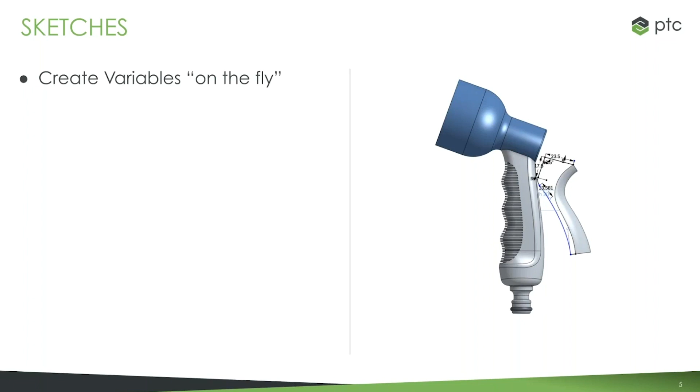The other one is constraining spline handles. This is something that a lot of users requested. If you do any kind of surface modeling, any kind of work with splines, one of the more common questions we got is, how do I manipulate the spline handles? I know I can grab and drag, but how do I constrain them? Or how do I dimension them? There were workarounds in the past where you could sketch lines between the points and use that. But now the spline handles are entities that you can select, that you can constrain, that you can dimension. So an important improvement for those working a lot with splines, the ability to constrain and dimension spline handles.

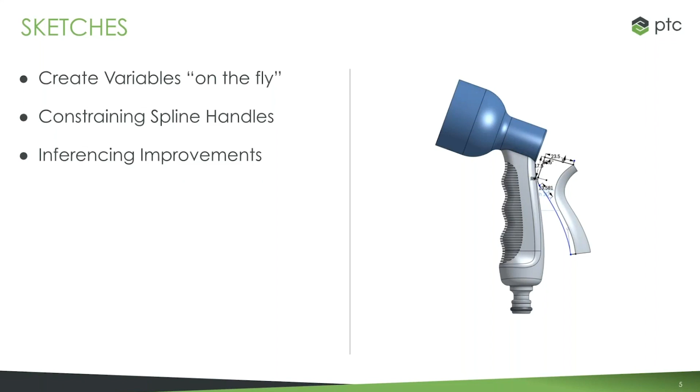So the final sketch improvement that I want to mention is inferencing improvements. This is a subtle one, and many of these, frankly, are subtle ones. But if you've ever done these things, or you do these things on a regular basis in Onshape, you'll know that we've made some serious improvements in how it behaves. So while they may seem subtle and small, they can be very big in terms of day-to-day use, especially with sketching, because sketching is stuff we do all day, every day. All right, so let's jump into a few examples of this.

I want to dive into a very simple example of variables, and I want to go through the workflow that we've done in the past and how we've improved it. It's very simple. If you've ever worked with variables prior to this update, what you had to do was click variable, give your variable a name. Let's call this OD1 and give it a value. There's other things you could do, like define different types of variables. But at the basic level, creating a variable is just giving it a name and a value.

You'd hit OK, and you'd see this variable in your feature list. Now, if you wanted to use this in a sketch or a feature above the variable, you'd have to drag it above, or roll up first. But it needs to be in the right position, so you kind of have to think about where's the variable going, where am I going to use it, and so on. So now I have the variable here, it's in my feature list. I can now actually use it. So there's the step of creating the variable.

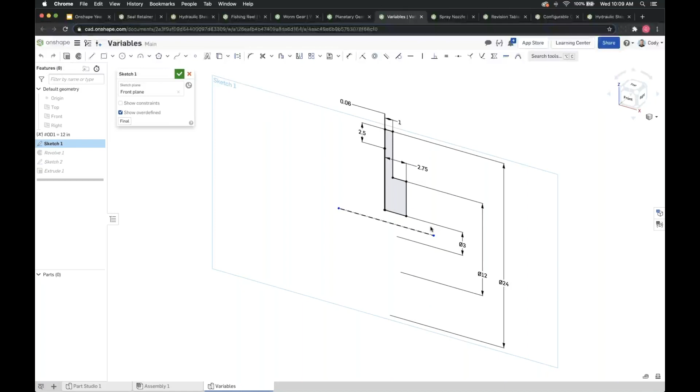Then there's the step of actually going into the sketch and changing something. So if I go in here, I can use hash symbol OD1, and it allows me to grab that variable. So that's been the usual workflow. To date, before this improvement, you would create the variable, then you would go into the feature or sketch that you want to use that variable, type hash symbol, and you would find your variable name there. But the feedback that we got is we'd like to be able to create variables on the fly as we're sketching and not have to think ahead and create the variable as a feature and drag it to where it needs to be in the feature list.

We want it to be a bit more intuitive. The thought was we allow the user to create variables as they're adding dimensions. It's a subtle thing, but if you do a lot with variables, it's a big improvement. Instead of creating a feature first, I just go straight into my sketch as if I were sketching.

I find the thing that I want to link to a variable, in this case this OD dimension. I double click as if I were changing a dimension. I use the same hash symbol, and you'll see there's this option that pops up as soon as you hit the hash symbol key that says new variable. Essentially, this just launches the variable dialog within the sketch. What I really like about this, though, is it automatically chooses the correct combination of things.

So you can have different variable types. But if you select a dimension, you're saying I want a variable tied to a length, because naturally that's the dimension. So it will select the appropriate type of variable type without having to do anything special.

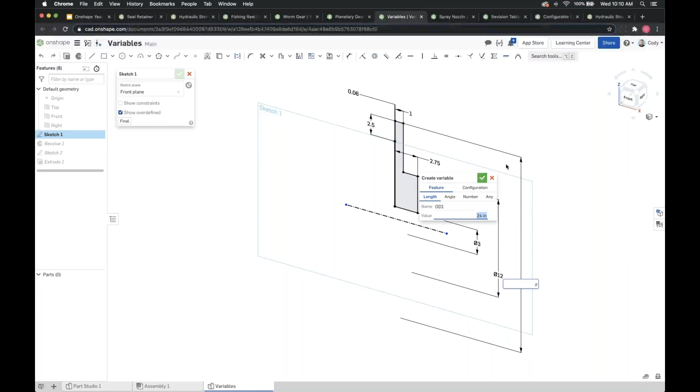Now it's pretty straightforward. You just type a name, let's say OD1. It grabs the value that's there by default, another cool aspect of doing it this way. Then you just hit the green check, OK. Notice what happens is it adds the variable above the feature where you want to use it. So you don't have to think about where am I going to use it, make sure it's higher than that in the feature list. It knows all that, so it just puts that in the necessary place.

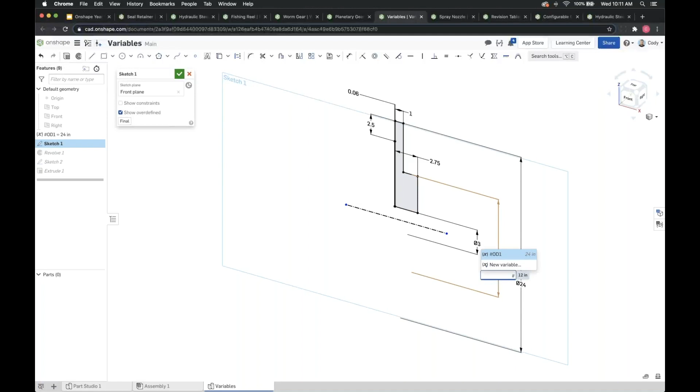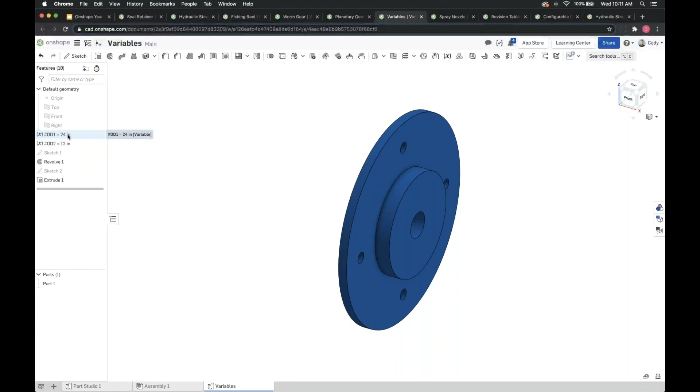So that's really all it takes. If you want to create variables, type the hash symbol into the dimension dialog, the little window, and you'll see this new option for new variable. You create the variable on the fly, and now you have variables in your feature list without having to go through the effort of clicking variable, defining it beforehand, dragging it up into its correct place in the feature list. It's much, much easier. So that's what we refer to as creating variables, quote unquote, on the fly. It just means you don't have to go through the headache of defining the feature first.

So the next one that I have is constraining spline handles. This is another one that's subtle. It's not a big change, but if you do a lot with splines, and we know there are a lot of people out there that do, this is a big quality of life improvement. That's the best way to describe it, because you would have to go through several additional clicks to do something like this previously.

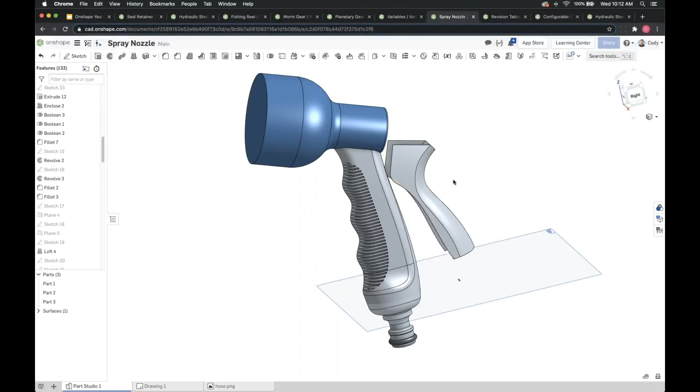So let's go to an example. Bear with me for a moment here. Let's say that I'm designing a spray nozzle, and I have this spline. Let's find the edge here. Let's say that I have this sketch that's composed of a spline, and of course any spline has the handles.

Now we've had spline handles, of course, since we added splines - it's not a new feature. What is new is the spline handle itself is a selectable line, so to speak. That wasn't always the case. You could select the endpoints of the spline handle, but the line itself wasn't always a selectable object.

So what a lot of people had to do was create a construction line, then sketch a line between the two points, and then constrain that. There were ways to accomplish this before, but if you have two spline handles on every spline and you work with dozens of splines, manually adding lines is a tedious task.

So in short, now when you go to dimension or constrain, you can select this spline handle as a selectable piece of geometry and define it - define the length of the spline handle, its constraints with surrounding geometry. All of that is much easier to do now as of this update last year. So that is improvements to spline handles, splines in general, and the ability to select a spline handle as a selectable object.

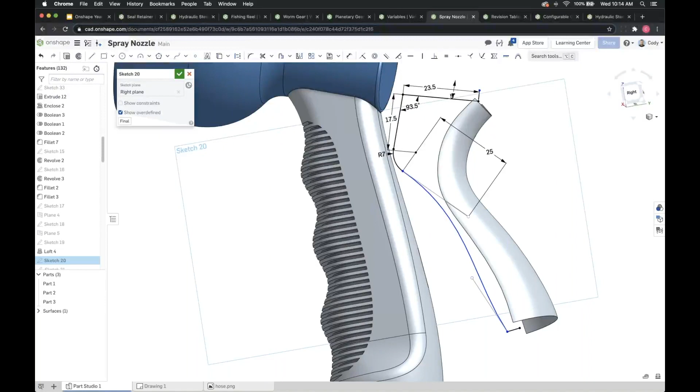All right, let's move on to the next one on my list. This is inferencing improvements. This is another one that sounds very small, right? At a glance it doesn't sound huge, but this is probably the single biggest sketch improvement we've made in many years now. That's a productivity improvement. And I'm going to jump into an example, bear with me for a second here.

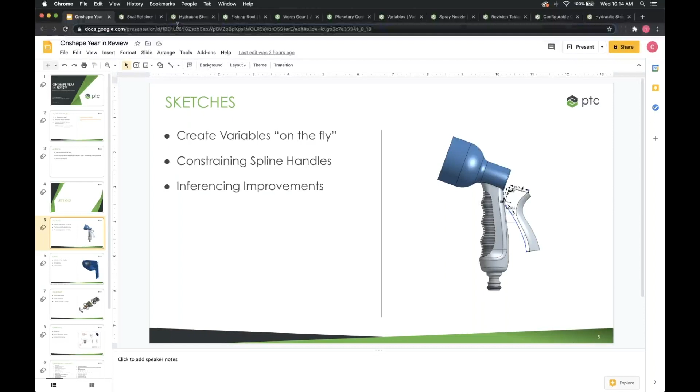Let's go into the seal retainer. Essentially, the way this improvement works is that you can reference edges, midpoints, and arcs of anything that's coplanar to your sketch plane. Now, this was a limitation in the past, especially if you had planes that happened to be coplanar with a face. What would happen is you would not be able to constrain relative to pieces of the surrounding geometry.

Again, this sounds really subtle and simple, but if I were to take you back a year, and you tried to sketch a line attached to this edge, you'd find you'd have to sketch the line and then manually attach it afterwards. Because there was no way to inference things that were coplanar to what you were sketching on. And in this case, this face is coplanar to the plane I'm on.

So if I wanted to grab the arc, the center point of the arc, any kind of reference off of these surrounding faces, I would have to sketch the geometry and then manually constrain. But now, because we've brought those inferences through, anything coplanar, you'll automatically get the midpoints, the endpoints, the arcs and edges themselves. So I can grab the midpoint of this arc, snap a line to the center, and not have to manually constrain anything.

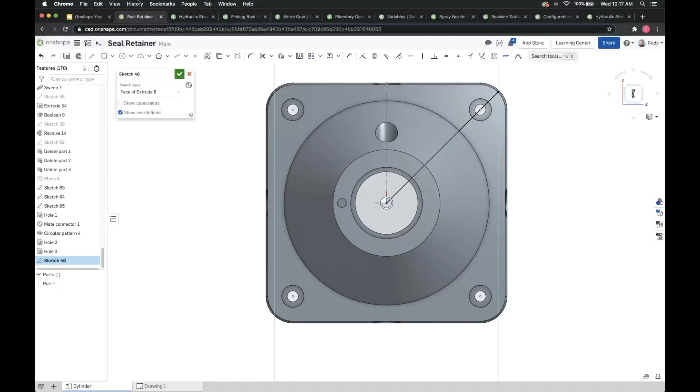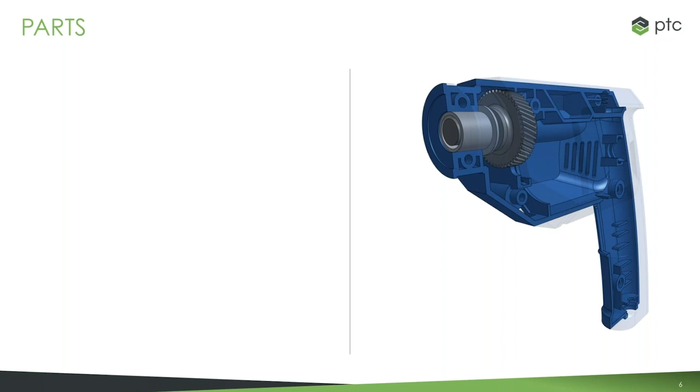All right, let's move on. The next category in our list is parts. There are a few highlights I want to point out in the Part Studio environment in 2020. As I mentioned before, there were a lot of improvements in 2020, so it's difficult to pick your top three, and it's highly subjective, but I'm doing my best to pick those I think people will like. The first is isolate.

This was something highly requested. We had the ability to isolate at the assembly level, and it was very much a liked feature, but we didn't have the ability to do this in the Part Studio. If you have a multi-part Part Studio, which is very common in Onshape, you didn't have the ability to quickly isolate things. There are a few really neat use cases for isolating a Part Studio that are actually unique compared to Assemblies. But in general, isolate is something we brought to the Part Studio that was highly requested, and again was in the past limited to Assemblies.

The next one is hole tables. This is something we did in a very unique, very Onshape way. We have our own built-in hole table functionality.

Anytime you use a hole feature, a hole table is automatically created. I think this is useful in a number of different ways. But the biggest thing I'd point out is you can look at all the hole information in the 3D model without ever creating a drawing, inserting views, inserting hole tables, or making a formal drawing. If you just want to know what holes are in this part, open up the hole table in the Part Studio and you'll have all the details there.

We found a lot of users, if they just want to know what size hole this is and how many there are, would have to create a drawing, insert tables, or know how to navigate the feature list. But now I could send this model to someone and just say click the hole table, and you have all the details for the holes you need, without having to create a drawing.

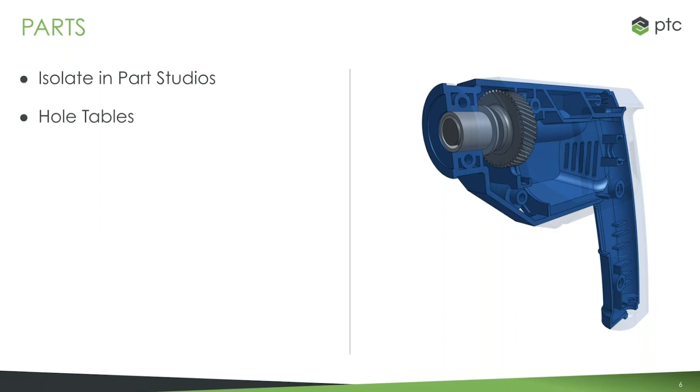The last one is face colors. This is another one that sounds very simple, very subtle, but is probably one of the most requested features we've had in a number of years. This is highly, highly requested. And although it is simple, it is something that nearly everyone wanted. It was something we heard a lot. So let's dive into each of these.

There are a few examples I want to show, but let's start with the hydraulic steering pump and isolate. I mentioned before that the ability to isolate in the past was limited to the assembly, and the ability to do it at the assembly level was very well liked. It was a very popular feature. But one common criticism was, well, I want to be able to do the same thing at the Part Studio. And we didn't have that functionality until this most recent update in 2020.

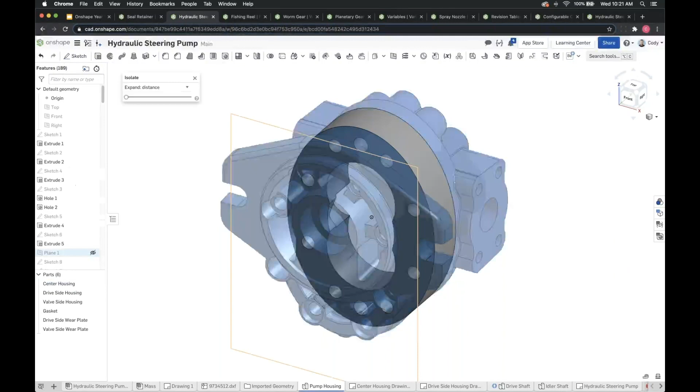So it's very simple. You find the thing you want to isolate, in this case center housing, and you right click and isolate. It works exactly the same way as it does at the assembly level. Right click the thing you want to isolate, select isolate. You can select multiple parts if you'd like, and isolate them, so you have the same kind of flexibility you'd had at the assembly level.

You can also choose to expand based on connectivity and distance, and bring in additional parts into the isolate, just with that grab and slide functionality. Same thing as at the assembly level. But the most important thing, in my opinion, is this really does simplify the ability to interact with certain faces or parts that were otherwise difficult to access.

A lot of people are aware of select other, where you can right click, select, and then grab a face or something along those lines. But this actually allows you to grab holes, faces, edges that are inside of the model very quickly. And it's more of a persistent state than if I were using select other.

A lot of times we get asked, how would you handle working on a part that's inside of another part? A lot of people will hide those outside parts, but then you're turning them on and off when you want to grab things from them. It becomes much more difficult when you actually need them. The neat thing about isolate is everything is still there.

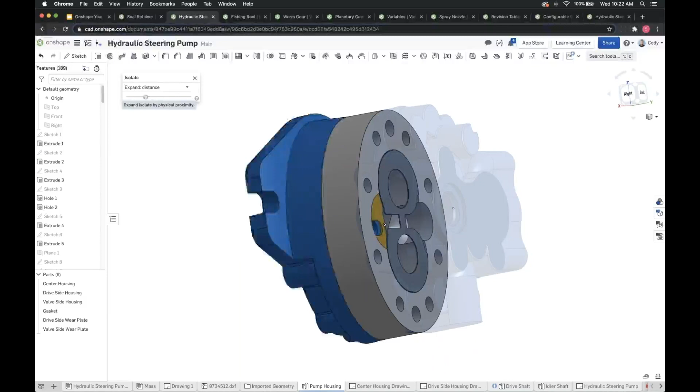I can bring it in or not, very quickly. But I can also grab the faces, the edges, all those types of things without having to do select other or any kind of other selection sets. So that is isolate in the Part Studio.

Of course, it's just a simple function: select the thing you want to isolate, right click and isolate it. But the big news here is it's been brought into the Part Studio, meaning it allows you to interact with the Part Studio, especially these kind of nested multi-part Part Studios, in a more detailed, easier way.

All right, so that is isolate in the Part Studio. The next one that I have is hole tables.

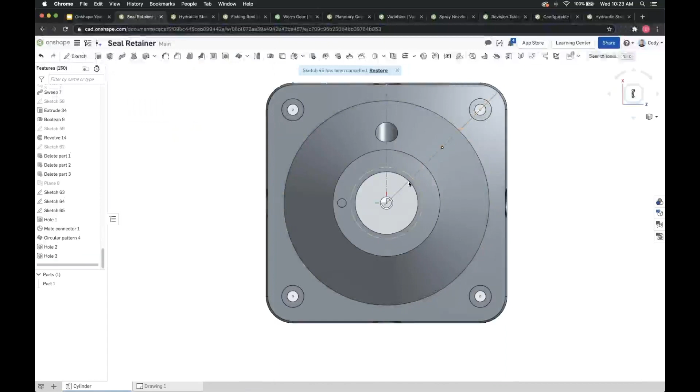This is another one that I think we've done in a really unique way, and that is essentially anytime you use the hole feature, our standard out of the box hole feature that you see in the Part Studio toolbar, you will automatically get this hole table flyout on the right hand side. And if you've used Onshape for other advanced features like configurations or appearances, you'll know this flyout has a lot of different functions.

So what we've done is build this table into an interactive piece of the UI. A lot of people will create a drawing just to get the hole table, with references and so on. But if all you're looking for is hole information and where those holes correspond with the part, this is just as useful, and there's no need to create a drawing.

In this case, you can see I've hovered over tag A for my hole table, and it says quantity 4, and it highlights the edges associated with those holes. So it's easy to get that cross highlight functionality, and even if I didn't model this part, I can quickly find the hole information.

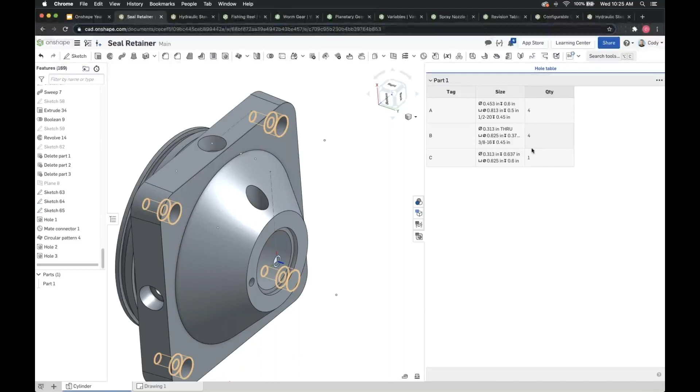And I think that's one of the biggest benefits of using this. Of course, it's nice if I have a very complex part with lots of holes to glance at everything quickly. But I think the real benefit is, I didn't model it, but I want to know what are all the holes. Maybe I need to buy taps or drills or whatever it may be. I can just open up the hole table, go through all the various holes, and mouse over them to see where they correspond with the model itself.

So a great visual. It allows me to see what's on the part, what the hole sizes are, and how many quantity there are. Now, as I mentioned before, you have the ability to do this at the drawing level as well. If you want your hole callout in the drawing, that still exists, but the big benefit is the ability to interact with these holes without having to create a drawing and insert a table.

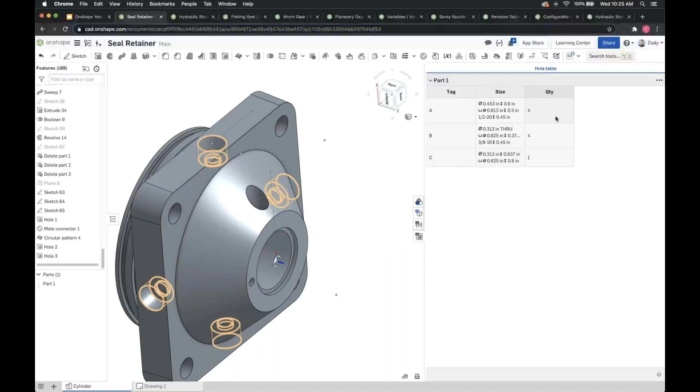One final comment is you can copy this. There's a copy functionality that allows you to bring this out into a different place. I'm often asked, what if I have holes that I want to drop into some software and maybe use to cut on a laser jet or something like that. You could do that. You can bring all of this hole information into a single sheet and use that to drive other things.

So that is hole tables. Again, the big thing to stress is anytime you use the hole feature, Onshape's default hole feature, you will automatically get this flyout. You don't have to do anything with it. It's much like the bill of materials at the assembly level. The more features you add, the more things get added to the hole table. But you're not forced to interact with it. It's just a neat way to see all of the holes in a part in a single place in the Part Studio.

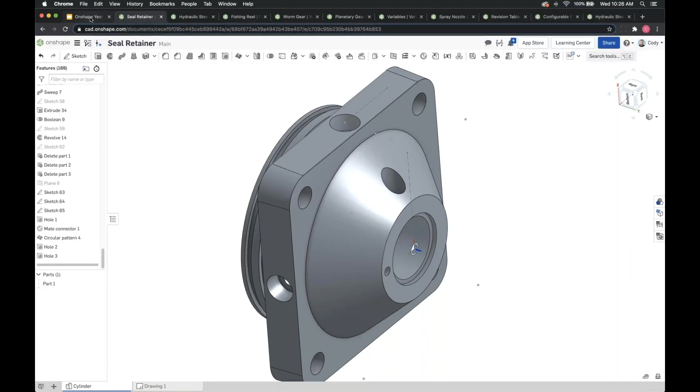So that is hole tables. Let's move on to the next one, and this one is face colors. The reason I think this is so important is just the sheer number of requests we got for this. This is a very simple feature in how you use it and how it's supposed to work.

You apply a color to a face. The limitation in the past was you could only apply a color to a part, the part was the lowest level, so to speak. So your entire part always had one color. But we often got asked, well, I want to make this part of the part this color. There are lots of different examples of why, but it was a limitation. In the past, you had to apply the appearance at the part level, and the entire part was the same color.

So a simple thing, admittedly, but something that was really highly requested. Although it's probably one of the simpler improvements we got, it's probably one of the highest requested in terms of just sheer number of people asking for it over the last several years. It's really simple to use, and as I mentioned before, there are a few examples where you might want to use it.

One example that we were often asked is, I want to be able to define machined surfaces versus painted surfaces, or machined versus cast, or I just want to be able to delineate between surfaces that are a certain color and surfaces that aren't. Machined surface is probably one of the more common examples.

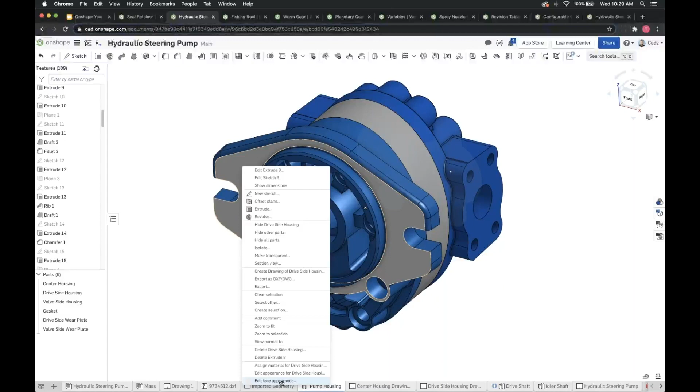Now, I will say once you have an appearance associated with the face, you right-click on it and you have this edit option. So it's important to keep in mind, if you need to go back and change a face color, just go back to that same right-click menu, right-click the face, and you'll see instead of Add it will say Edit, and you can go right back into that dialog.

Another neat thing that we did with this same update is the appearance flyout - the appearance panel on the right-hand side. This is another use of the right-hand panel flyout, but it gives you all the appearance information in that Part Studio. So you can see that most of my appearances are applied at the part level - the center housing, the valve side housing, these are all part level appearances. But there is a drive side housing that is largely blue, but has one face selected that is this color that we specified. If I double click, it will take me back into that appearance dialog, and I can change the color from here also.

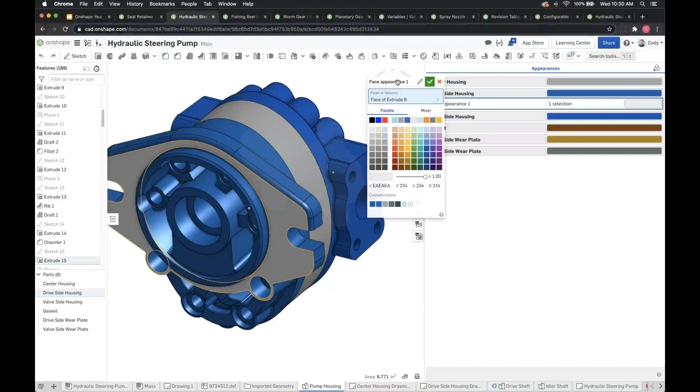So just a tip, if you prefer to interact with all of your appearances in a single flyout - a lot of people will build their model and then go through this appearance flyout and make everything look realistic as kind of a last step - this is an easy way to go through everything at once and do that. So that's the appearances, face appearances, and the appearance panel flyout.

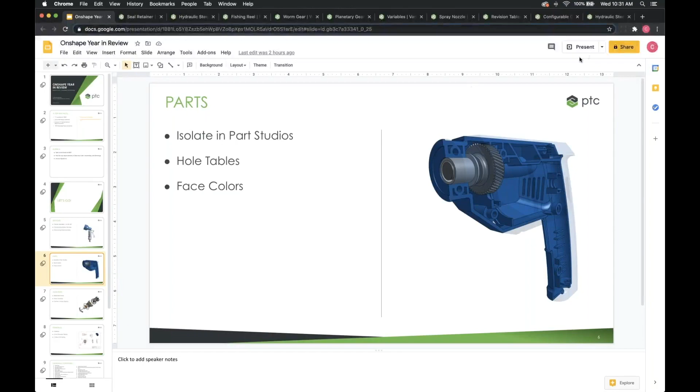All right, so that is face colors or face appearances. Let's move on to the next topic in the list, and that is assemblies.

So there's one really big improvement that we did with assemblies in 2020 that, of course, I want to start with, and that is exploded views. For a number of years, of all the improvements we're going to talk about today, this is the most requested - across the board, whether it's professionals or enterprise or students. Everyone wanted exploded views, and so it's a really popular, important feature of any CAD system. And in this case, we added it in 2020.

Now, in usual Onshape fashion, we've done a lot of unique things with exploded views, and I'll go through and highlight some of them in this webinar. But we've done a dedicated webinar on exploded views, so if you're interested in really diving into exploded views, the details of creating them, I'd really recommend checking out that webinar.

It's a whole hour on that topic alone, and we'll give you a lot more information than I'll be able to get to here. So that was a very big improvement.

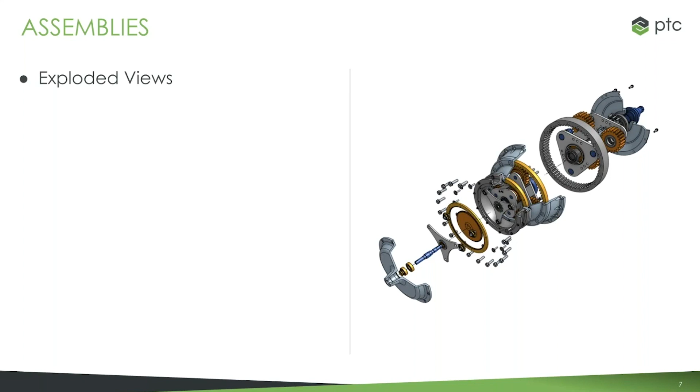I think it was in the February update in 2020, so we added exploded views. We also added a number of other improvements that I think are valid. When I say exploded views, I also include exploded view lines and the ability to insert those exploded views into drawings. All of those things came in 2020.

Another highly requested one, very simple but very important: mass override. You have the ability to assign a material to your parts in Onshape, and that will give you a mass. But oftentimes we're asked, well, I imported this part, I know what the weight is, and I can't figure out how to get the material to match the weight. So what you do is you just override the mass. I'll show you an example of this in just a second. This is particularly important when you've imported parts or geometry and you need to assign the mass. You know what the weight is, you need to assign it. In the past, people would choose random materials that got close, but there was never really a good way to define a mass. So mass override, that's a very big one for assemblies.

The final one, somewhat related to mass override, is the center of mass display. This was highly requested at the assembly level, some kind of visual for the center of mass, and now we have that. In the past, we had center of mass as units, you could see the numbers, the location for the center of mass, but there was never any visual in the assembly itself of where that center of mass was. So that's the improvement added in 2020. You'll actually see a little indicator at the center of mass when you're looking at mass properties.

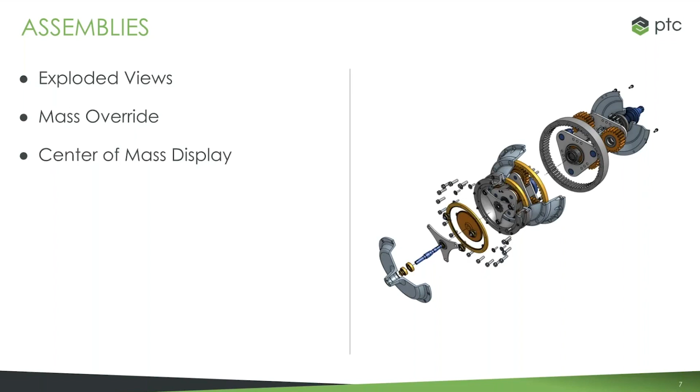All right, so let's dive into it. I'm going to spend just a few minutes going over exploded views. I know I'm just going to touch the surface for many people out there, but I'd recommend if you're interested in a deep dive on exploded views, check out the webinar we did right after we launched it.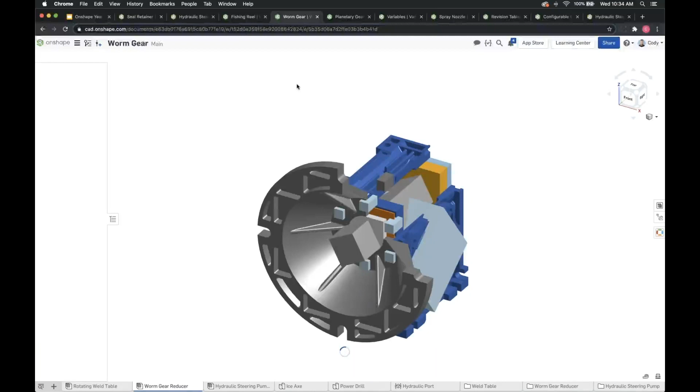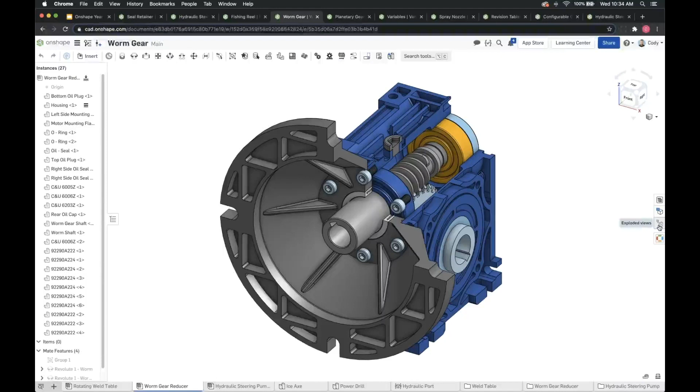So let's start with how to start your exploded view. Here we have this worm gear assembly, and of course the goal here is to create an exploded view. A lot of the functionality I've shown you over the last 10 minutes or so has involved interacting with these flyout panels, and exploded views use the same functionality. On the right side, in any assembly, you will see this exploded views flyout.

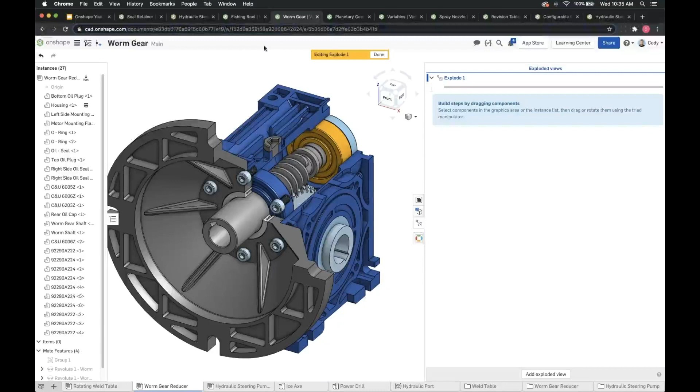I left click that and it brings up the exploded views flyout panel where I can build my exploded view. It's fairly straightforward: you click add exploded view, and you'll see the toolbar disappears because you're going into an exploded view mode. That's the way to think of this. If I want to go back and edit mates or manipulate the assembly outside of creating exploded views, I would need to click done to get back into that assembly editing mode.

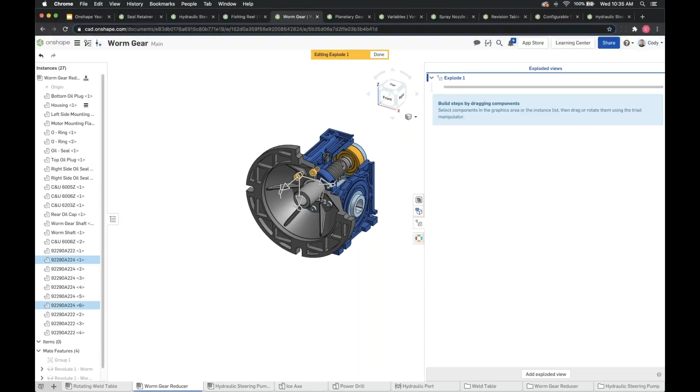But in my case, I want to create an exploded view, so I start by dragging components. You see it gives me instructions here. I'm just going to grab a series of bolts and drag them out. So we'll grab and drag, and what you'll see is as soon as I let go of the mouse, explode step 1 appears, as well as default explode lines.

Now the explode lines are on by default, and they come from the centroid of the model, but you can adjust that. If you want explode lines that come from a very specific place, you can choose a vertice, a face, or an edge, and the explode lines will reroute from that reference. But by default, when you create your exploded views, you will automatically get explode lines from the centroid of the part being moved.

Now, the other thing I would point out is by default, you're just dragging it out at random distances, but you can type in actual values. So I can type in an actual offset.

As you start to get into more complex exploded views with many different exploded elements, you want evenly spaced exploded views, and the explode distance becomes important. I've even seen people use configuration variables to control these types of things. There's lots of neat things you can do with the distance itself.

By default, when you select parts and grab and drag, it's just using the default orientation of the assembly. But you can specify a direction. If I need to explode along a certain edge or axis, I click specify direction, then click on an edge or reference, and it will explode along that direction.

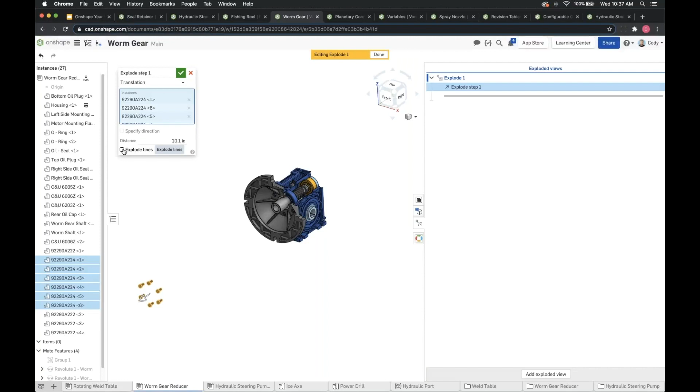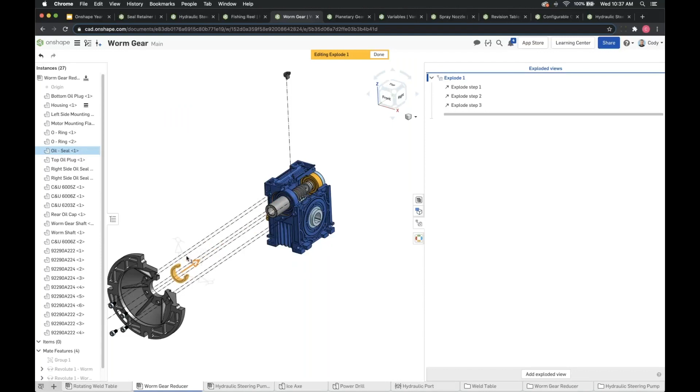So that's really it to creating exploded views. I hit the green check, and now I have my first explode step. I could go right into the next step, clicking the housing here, grabbing and dragging, and now I've got a new explode line, a new explode step. I can hit the green check, move on, grab the next one, drag, and very quickly start to tear the assembly apart. Keep in mind the explode steps are very easy to create—just grab and drag until you've disassembled your assembly.

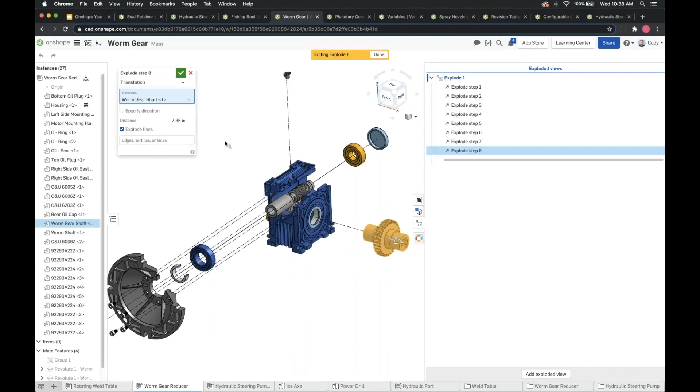I'm going through this quickly here, but you kind of get the idea. So now I've created this exploded view, and what I want to do is go over a few tips I have for interacting with exploded views. Just a few random tips, so bear with me for a moment.

Let me jump into my planetary gearbox. And while I'm doing that, let me answer a quick question: if the same components are then exploded orthogonally to where they are now, will the lines follow? Yes, if they're exploded in a separate step. I showed you one explode step, but you can have multiple explode steps, and it will capture those movements with explode lines.

Can you turn off individual explode lines? That's a good question—I don't think so. I think every explode line is associated with the movement. Now, you could just create one explode movement involving one part and then turn off that individual explode line. I'll double check this; I don't think there's a way to turn off individual explode lines if I'm generating multiple at once, like a right-click hide type functionality. But I'll double check that just to make sure I'm right.

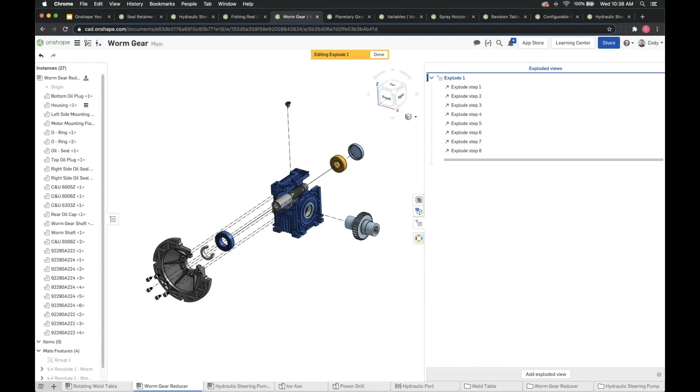All right, so let's go back to the basics. What I want to do is go over a few of the things that I think are really unique about our exploded views, and things I like to point out.

The way we've created exploded views is unique in the sense that you interact with this flyout. You have this flyout that comes out from the right side, and each explode step is essentially very much like a feature in a feature list—it's regenerated in a specific order. That means you can change explode step order by just grabbing and dragging.

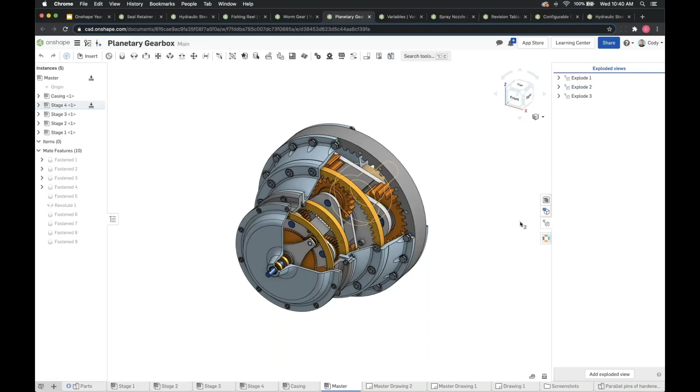Let's go ahead and activate this explode. So you can activate individual explodes by right-clicking. You can expand them out and see individual explode steps, edit from the right-click menu as well, and dive into each individual one.

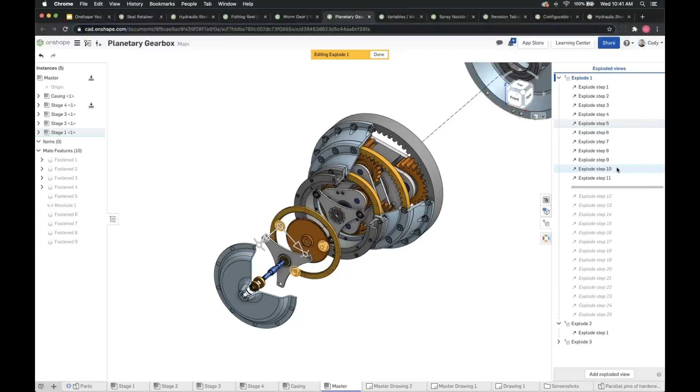Now, when you do this, let's go into another explode step here—while I'm editing this, I can also roll back. I can grab this rollback bar and roll up and down through my various explode steps, so I can interact with it as if it were a series of features in a feature list.

We wanted this to feel, to look like and behave like features in a feature list, where you can grab and drag and reorder, and use this rollback bar as a way of seeing all the various steps. I know people who've actually jumped through each step, recorded their screen, and animated a video from it.

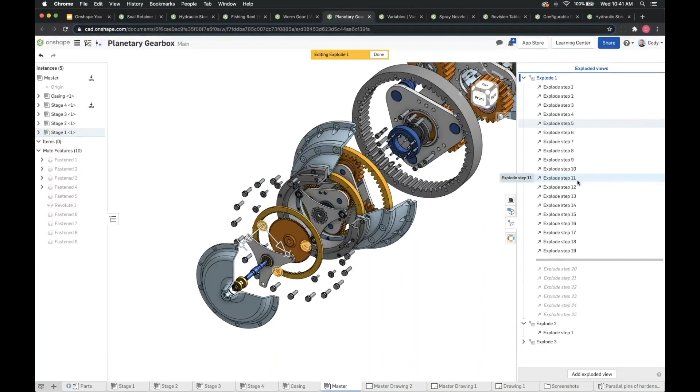One question I see there: can I record this to make an animated output? The answer is not today. You can record your screen, of course, but there's no Onshape function to accomplish that.

You would use generic screen recording tools, and then just go through your various explode steps. That is an improvement that we've heard a lot from others, so it wouldn't surprise me to see it added in the future. But there's no way today to animate all these steps and save that as an animated output, an animated video.

Another comment I would add about exploded views is you can have multiple, right? So you'll see I actually have 3 different exploded views here. There's lots of different examples. Maybe you just need different exploded views to show different steps, or whatever the use case may be. But the big thing I like to stress about this is you're not limited to a single one. You can have as many as you'd like.

Another really neat thing about this is it applies across all configurations. So a single exploded view you can create for hundreds of configurations of your assembly, right? And you don't have to recreate the exploded view for each individual configuration. As I mentioned earlier, there's lots of really neat things you can do with configurations and exploded views to automate the process of building them.

But definitely, if you're interested, check out the exploded views webinar that we did in the past, and I believe we've also done an advanced exploded views webinar that goes over some of those in more advanced details.

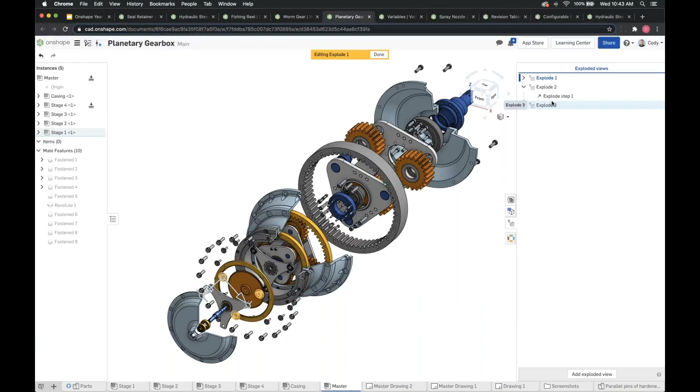All right, so for the sake of time, I'm going to move on. But again, I highly recommend you check out the webinars we've done in the past if you want a deeper dive into exploded view. All right, the next one that I have is mass override.

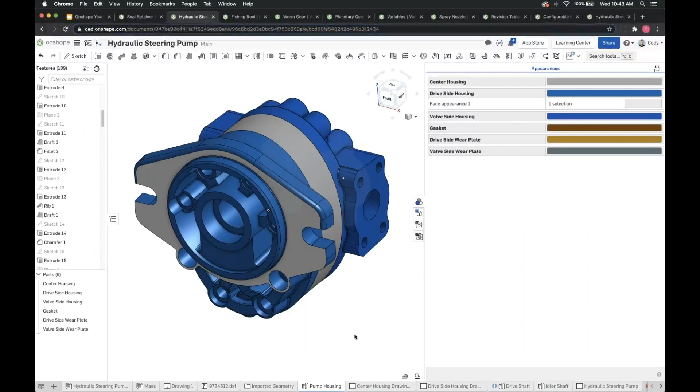This is one that I think is particularly important if you work a lot, like many people do, with imported geometry. So let's go back here to our hydraulic steering pump. This is the part studio that we were looking at just a moment ago. And in this part studio, let's actually go into a bit more realistic example, let's go into the drive shaft.

Let's say that I import these gears. Maybe this is a combination that I import from McMaster-Carr or somewhere else. What happens is you'll get these imported parts, and the weight of them, right, because it's in a book, it's in a manual, you've weighed it, but the weight of the physical object that's going into your assembly—you know the weight of the thing, you bought it, and the vendor sent you a parasolid or whatever it is. And so what happens is the weight is very difficult to get right in Onshape.

At least prior to this update, you'd have to assign a material and then look at the weight, change the material, assign the weight. It's very tedious to even get it close, and it was not perfect. So what we've done is say, well, rather than allowing the person to do some kind of custom material definition, just allow them to define the mass directly.

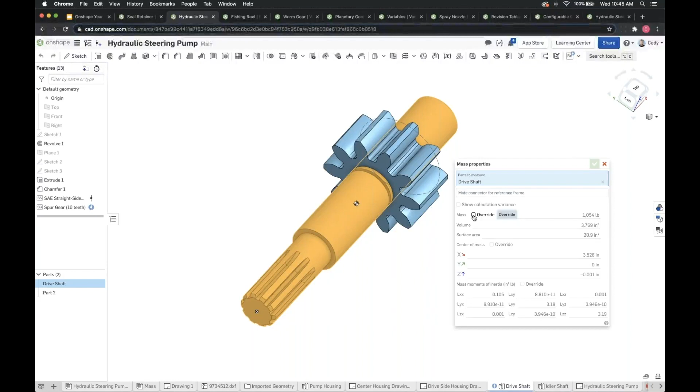And the way you do that is through the mass properties dialog. So when you select the part in the part studio that you want to change or override the mass of, and then you right click display mass properties, you'll see this override checkbox. By default it's going to give you a value, assuming you've applied material, but you just check override and you can type in whatever value you want.

This has lots of implications downstream naturally when you take a part that has an assigned mass and you insert it into the assemblies, and it has those downstream effects. But the big thing is now you can have accurate weights, accurate center of mass, without having to manually manipulate it in a very tedious way.

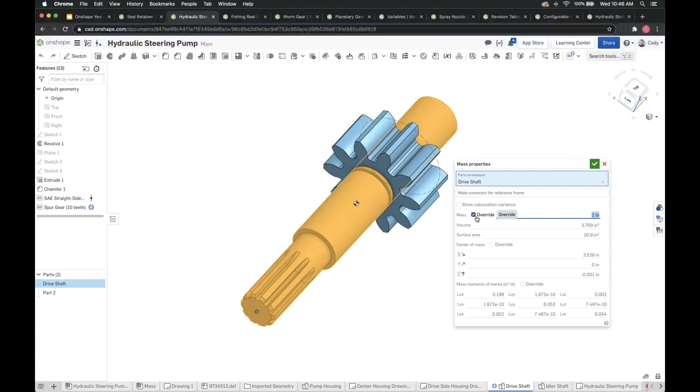So again, the improvement here is really just this checkbox for override. When you select the part, click Display Mass Properties, check Override, type in the weight, and that's really all you have to do. The most common reason I think most people want this is they want the ability to import geometry from other systems that they know the weight of and just assign the weight. All right, so that is mass override. And you may have caught the next improvement there.

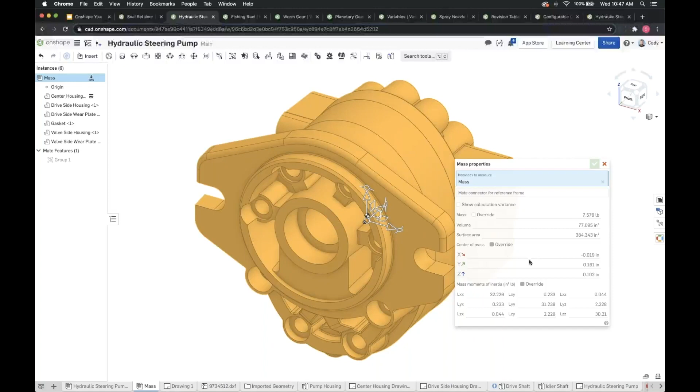It's a subtle thing, but the next improvement I want to talk about is center of mass display. It's technically not just for assemblies, but I think it's most relevant at the assembly level. It's real simple. In your assembly, let's select our assembly here. If I go to Display Mass Properties, just selecting the assembly and clicking Display Mass Properties, you will see center of mass right here. So that's really the improvement, that visual indicator.

We had the values in the past, so you could see X, Y, and Z values. You could figure out where the center of mass was, but there was no easy way to visually see it. So what we added is the ability to see that little point in space with respect to your assembly or part. That's the improvement around center of mass, just this little visual indicator as to where that place is.

There are lots of designs, lots of products out there where center of mass is a really critical thing, and you may just want to constantly be able to revisit it.

Good question. Would be useful to override mass at the subassembly level, multi-body level. Well, I can override mass here at the subassembly level. So to be clear, this is a subassembly mass, and I'm checking override, and I'm typing in an overridden mass for this subassembly.

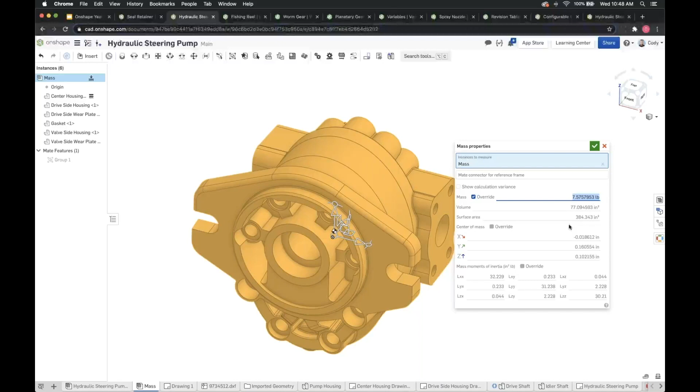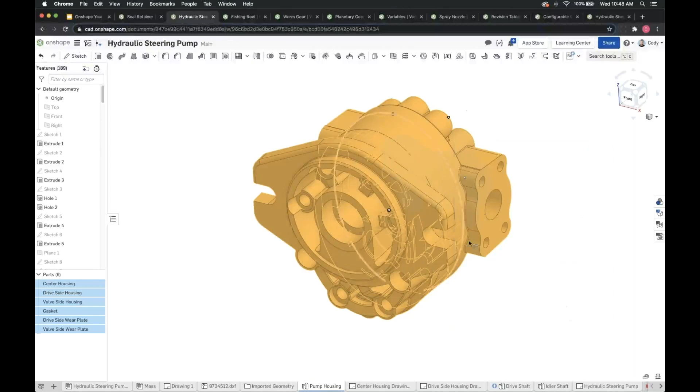Multi-body, well, let's just try it. Forgive me, multi-part. Let's just try to be safe. Yeah, that's a limitation. You couldn't assign the mass to all the parts. You would create an assembly and override the mass of the subassembly.

But that's a good question. I showed you the example of overriding a single part, but if you want to override the whole assembly, you can do that too. Where the limitation lies is selecting handfuls of parts, or multi-part in your example.

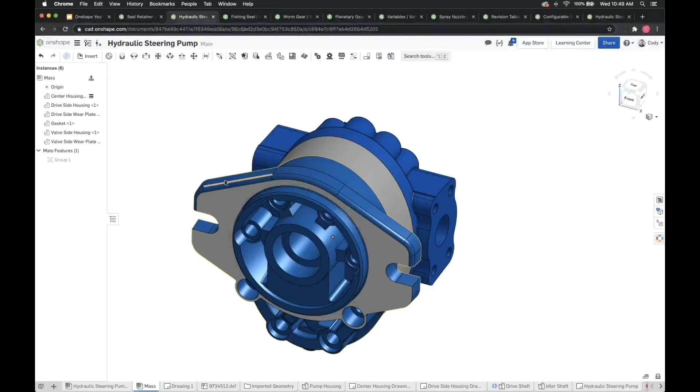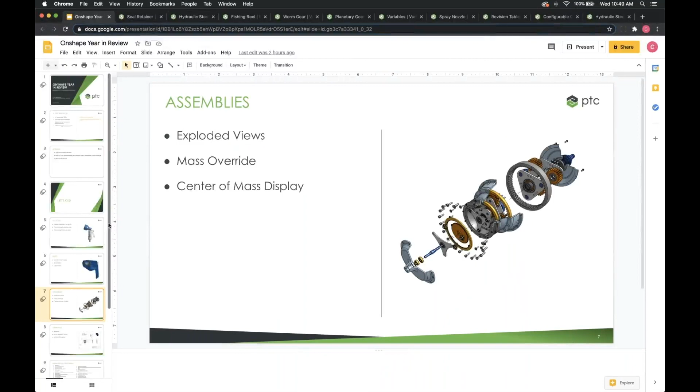Okay, so we have a few more minutes, just 10 more minutes left, and I want to dive into the final topic of the day, and that is drawings. Now, I will say, of all the things that we talked about so far, in terms of sheer volume of improvements, drawings got the most attention.

Drawings is a very detailed, nuanced thing. It has lots and lots of options and checkboxes and just lots of complexity because there are so many possibilities when creating a drawing. So naturally you would expect lots of improvements to drawings, and that's what we've seen. I showed you earlier on, we had around 80 improvements just to drawings alone in 2020. So picking three of all the categories, this is the most difficult because there's so many drawing improvements in 2020.

But I want to start with what I think is the most popular. This is another one that's been requested for many, many years, and that is markup. The ability to mark up drawings is something that people have asked for since we've had drawings. And it's something we now have. As of 2020, you can now mark up your drawings.

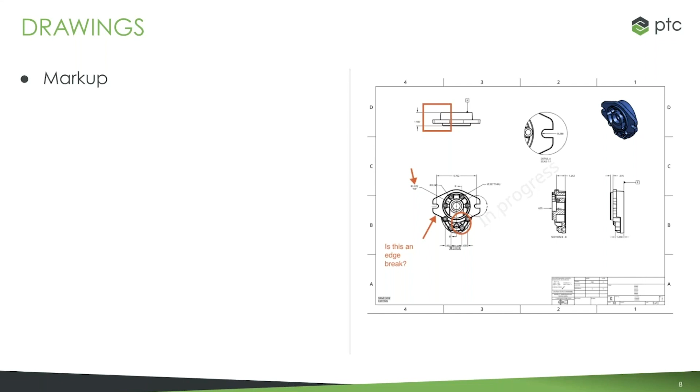Now, I should stress, markup is not specific to drawings. It actually works in parts and assemblies as well. But I think many people are going to use it at the drawing level, so I included it as a drawing improvement. But just to stress, if you ever need markups at the part or assembly level, you can do that too. Now, there are a few other improvements I'd like to mention.

Smart revision tables is a big one. You're using release management, you have the revision table inserted into your drawing, and you want it to behave in an intelligent way. So what we've done is build a smart revision table that allows you to set the number of revisions you want to keep and automatically exclude others. It does a lot of things that would be tedious to set up and administer in many traditional PDM systems. So smart revision tables, a very big one in drawings.

And then finally, callout grouping. So revision callouts or balloons, you can now group with dimensions and they behave in a grouped fashion. This is really important when you're tying callouts of any kind—it could be rev callouts or balloons or whatever it is—to a dimension, because now they behave as one thing.

In the past, if you wanted to relate things, you just had to put them close to each other and hope that no one would notice they're not linked. But now you can actually group these things together.

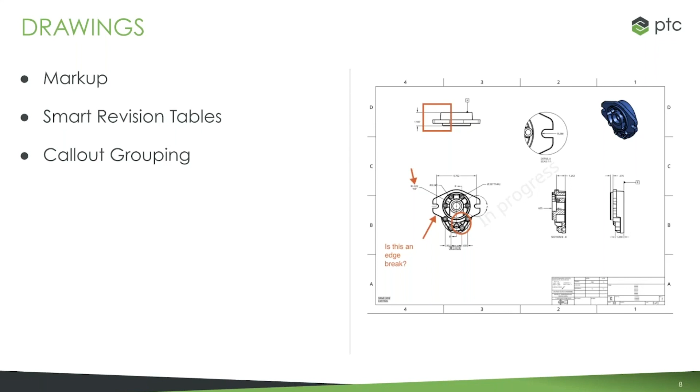All right, so we have a few minutes left. Let's dive into these last few improvements and go over where I think they're most useful.

So what I'd like to do is dive into a real simple example of how to use markup, and I think it's going to be most popular, because a lot of users want the ability to take a look at the drawing and say it needs to add this, you got to get rid of this, you're missing that, and they want to relay that to someone else. That's where markup is really useful.

Now, the way you access markup is via comments. All markups are essentially just integrated into Onshape comments, an additional function within them. So the way it works is you click comments, you'll see this little button for markup at the bottom right corner of the comment dialog. I click markup, and it takes me into this markup mode.

The toolbar disappears, the drawing now appears, but I have this limited tool set, really just markup tools. They're fairly straightforward: arrows, lines, a pencil or pen, ellipse, rectangle, and of course text. You also have these simple shapes that you can define with separate colors.

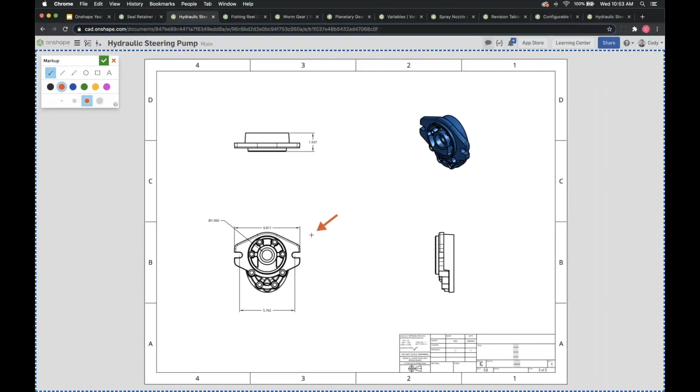It's fairly self-explanatory. If I want to create an arrow and set my color, say a red arrow, I just click and then left click drag an arrow.

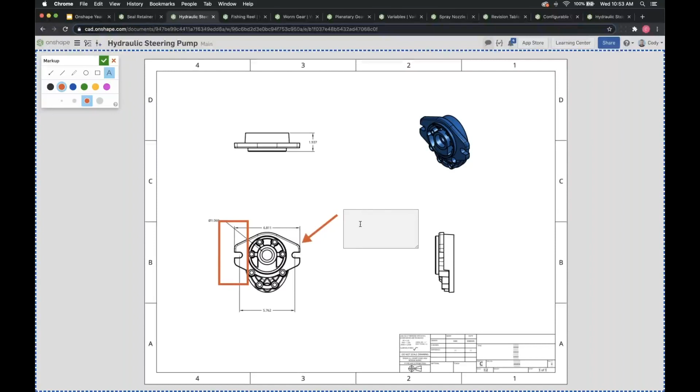Now, you could do a number of other things. I can have rectangles. I can have an ellipse. I can have text. So if I want text, I left click and drag this out and say, what radius is this? So I can add a text box to my drawing and to my markup.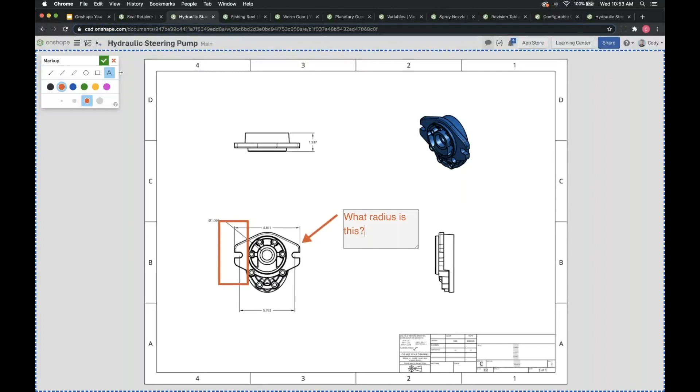But that's really it. You have your markup tools and some basic shapes that you can define. You mark up the screen, in this case the drawing. As soon as you're done, you hit the green check, and it takes that markup screenshot and attaches it to a comment.

So now I can easily say, can you take a look at this? I can even ping people associated with it, and I can assign it as a task using the @ functionality, but it's all built into the comments. It takes that markup and attaches it to the comment.

And you can see that's what the user will see. So if I'm communicating with someone doing my drafting work and I add a comment, they're going to fly out and see this screen. Then I left click, and it brings up the markup so I can see it in full resolution.

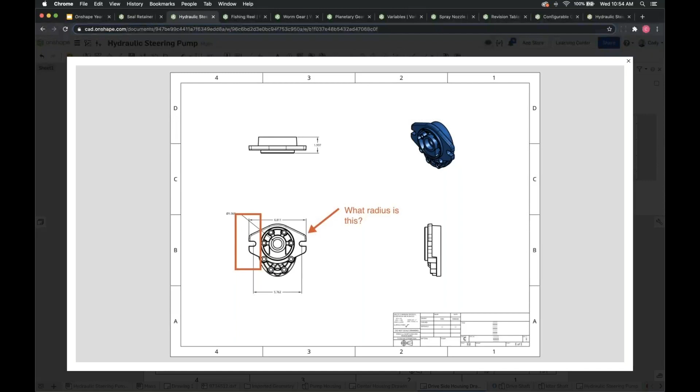So that is markups. Again, a relatively simple feature, but something that many people have requested. When we released this, most people were using screenshot tools.

They'd grab a screenshot, use some other software like a markup tool, like Snagit for instance, attach that to an email and send it to someone, who would mark up their screen and send it back. So the idea behind this is to try and keep all of that communication inside of the comments, by allowing you to mark up your Onshape interface and attach it to a comment, so you don't have to go to external tools to accomplish that same functionality.

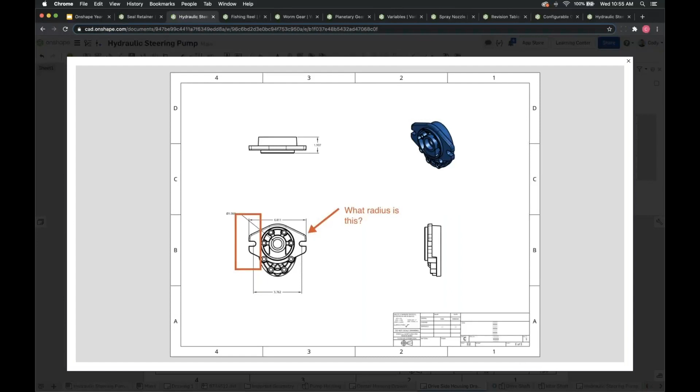More importantly, it's all integrated and fully intact in that single document. You don't have to go to an email history to find why a certain decision was made. So that's comments and the ability to add markup to comments.

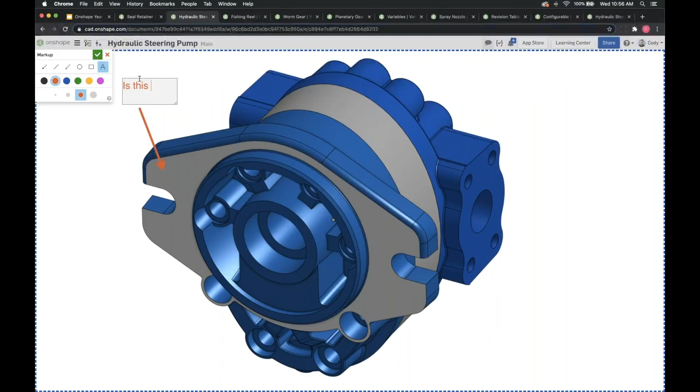And as I mentioned before, this is not specific to drawings. If I go into the comments, I can add new comments afterwards and add markups to them. So I could go in and mark up, in this case, the 3D model, and say, is this right? Is this the right color? Hit OK, and now it's going to attach that markup to my comment, but of the 3D model.

Just to stress, this isn't specific to drawings, but I think it's going to be most common there because that's where many people have requested it.

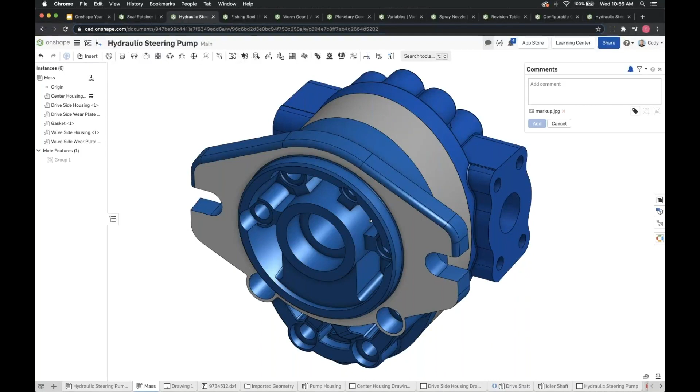So that is markup. We have just a few minutes left, so I'll go over these final few quickly. Smart revision tables is a very neat aspect of Onshape because it allows you to insert a revision table, have it automatically update, and truncate in situations where you want it limited. If you've ever set up revision tables in traditional systems, getting them to behave as expected can be challenging.

To go through this quickly, you'll see a new Insert Revision Table icon in the toolbar. You click, you insert. You can define whether it's multi-sheet or single sheet, how many visible rows you want, and what order it should be in, top to bottom or the inverse. And then, of course, you can also define your fixed corner, very similar to bill of materials. So that's your options. You hit OK, and it inserts your revision table.

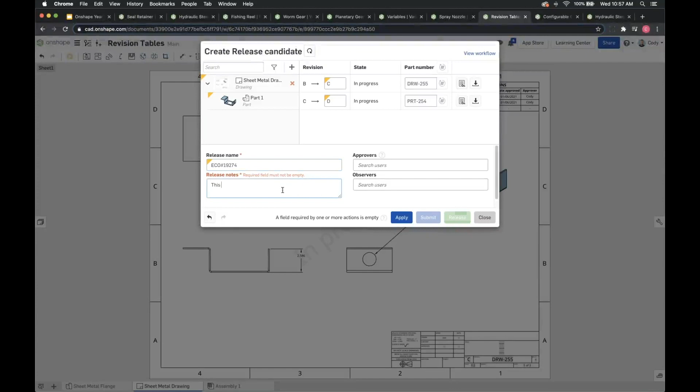What's really neat about this is if you were to release, let's do that. Let's grab the drawing and the part, release them here, and say this looks good. And let's release it. It will automatically update that instance. The big thing is, especially if you get into more complex revision tables with dozens of revisions, managing that table for a lot of companies is still a very manual process.

The neat thing here is I'm defining the number of rows. It's all built into the release management tools of Onshape. So if I add 10 revisions, it will automatically start to truncate and give me an intelligent revision table.

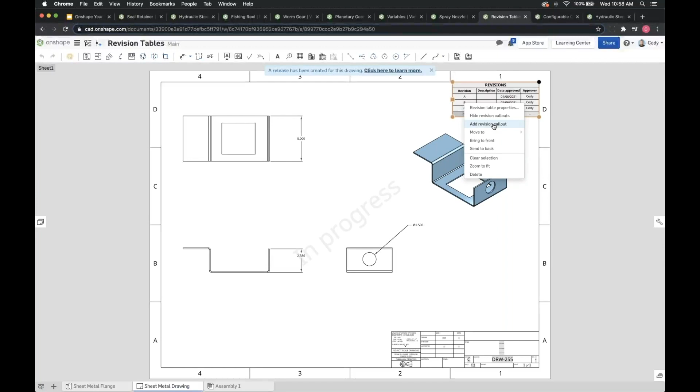Final comment on drawing improvements is the callout grouping. The callout grouping applies to balloons, any type of callout. I'll give you an example. Let's say that I add a revision callout. To add one, I just right-click the revision table. You'll see this add revision callout option, and I can attach or group that callout with a dimension.

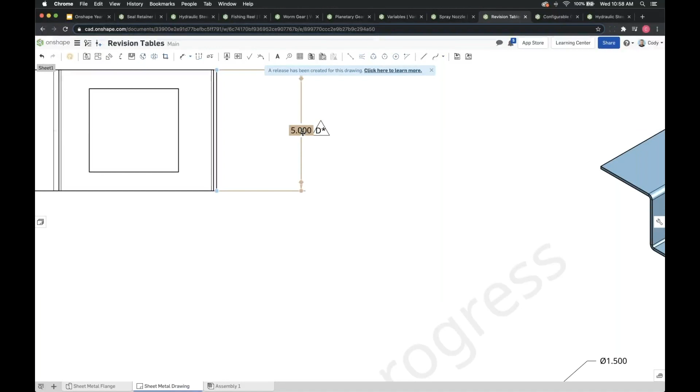In the past, you had to manually line these up, and there was never a good way to get the two associated with each other. But now you can group them. So now when I left click and place this revision callout and grab and drag, it will move along with it. But you want to be careful. You'll have options for top, left, right, bottom. You want to make sure you're attaching to the right place. But that's grouping the callout with the dimension.

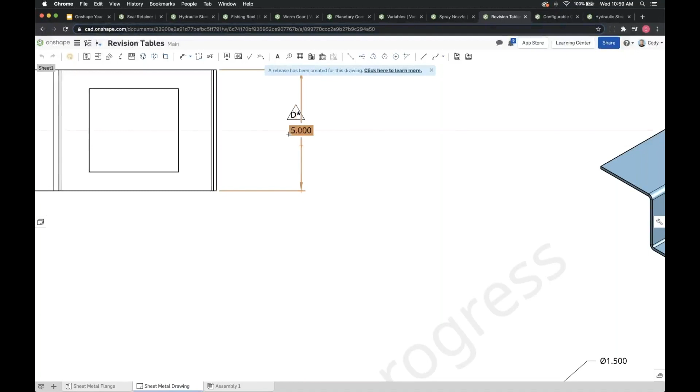You'll see as you drag it around, it will snap to those callout points, and you'll see them there as well. Callouts, balloons, revision callouts like this, of any type, can now be grouped. So that is the final drawing improvement I wanted to mention.